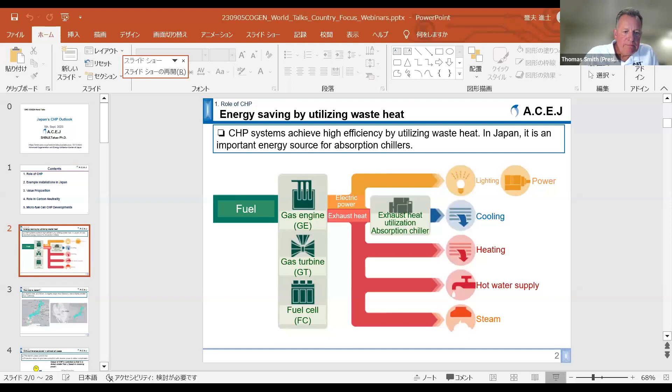Dr. Shinji, you may be on mute there. Okay, perfect, I hear you great. Can you also turn your camera on, please? Camera on, okay. Ben wants to make sure he's looking at you throughout the presentation. Can I start?

You don't have start video on. Can you start video, so we can see you? He just wants you to turn your camera on while you're presenting. The host stopped the video. Just say start video, you'll be fine, and it'll still share your screen. I will find a way to solve that. I tried to start the video, but the host stopped the video. Okay, you're back. Sorry about that. You're welcome to start.

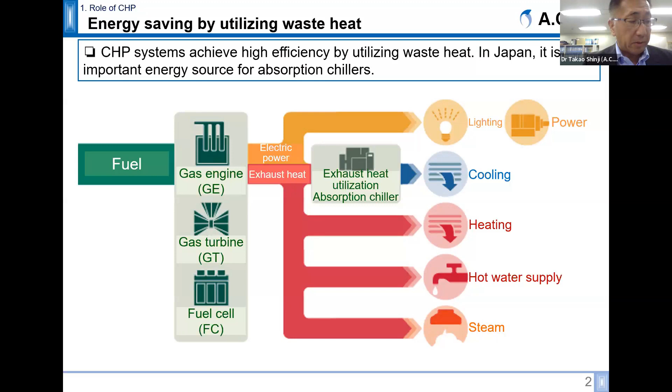CHP systems achieve high efficiency by utilizing waste heat, which is usually converted into steam in industrial use. Japan runs mainly north to south and therefore has distinct summer and winter climates. For example, temperatures in Tokyo range from 35 degrees in summer down to 0 degrees in winter. Both heating and cooling are important and benefit from utilizing waste heat in a CHP system.

In Japan, it is common to operate CHP without reverse power. In other words, excess generation is rarely sold back to the local utility. The reasons are related to the price of power and the technical requirements for grid interconnection. The price the utility is required to pay is rather low, making it uneconomic for the generator. In contrast, PV output is more economic.

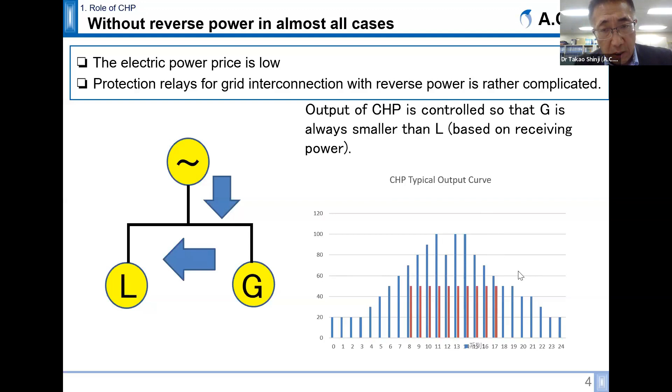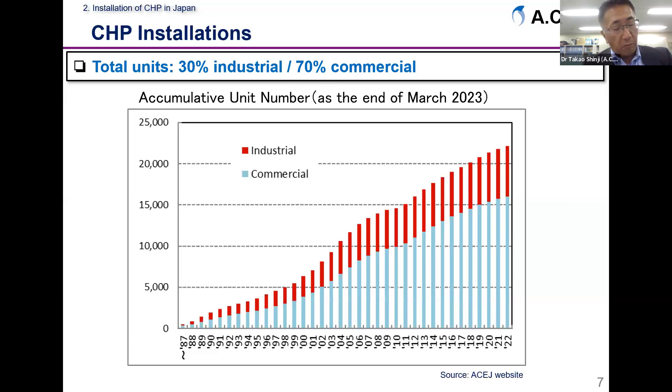If we look at the breakdown of installed units, about 30% is industrial and 70% is commercial. That is because industrial loads require larger CHP units. Industrial CHP units are usually in the 2 to 5 megawatt range, while commercial units are in the 0.2 to 0.5 megawatt range. This is the capacity, and this is the unit number.

The next, this is the industry breakdown by sector. Of course, utilizing waste heat is integral to CHP, and so sectors that consume a lot of heat are most suitable for CHP. The chemical, food, pulp and paper sectors are good examples.

The pulp and paper industry has used CHP for over 100 years. The pulp factory generates electricity by combusting a pulp byproduct known as black liquor. The steam produced is used for drying paper.

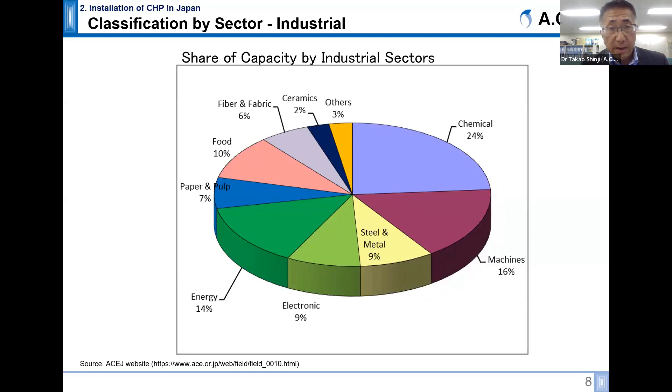This is the sector. This is the capacity. This is the number of units.

Third, the new values of CHP rather than energy saving. Energy arbitrage is a valuable tool for consumers who are looking to cut costs and reduce their environmental impact.

In the past, the price of electricity used to be constant regardless of the season, the time of day, or the available supply of electricity. Now, Japan Electric Power Exchange, or JEPX, runs a wholesale electricity market, and the price of power varies with supply and demand.

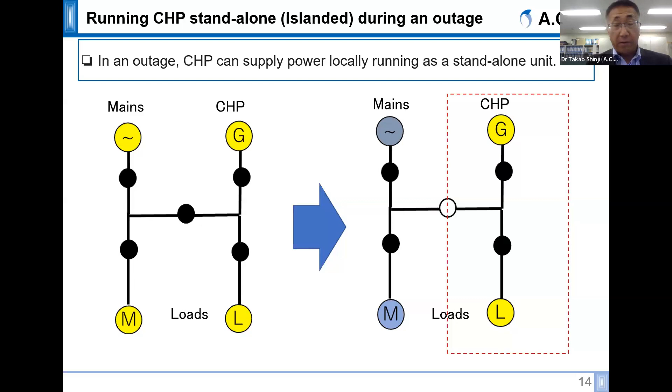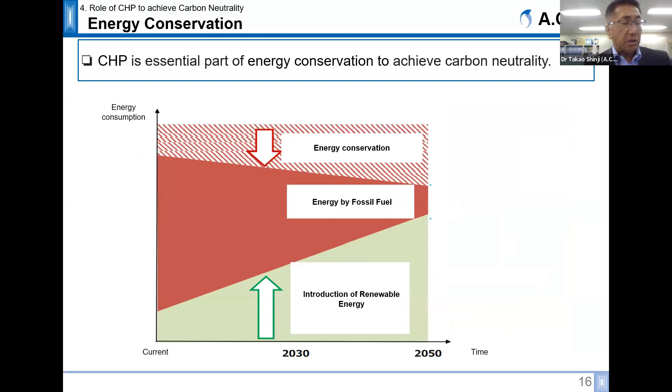And fourth, the role of CHP to achieve carbon neutrality. Energy conservation is one of the most important benefits of CHP. Of course, renewable energy is key to achieving carbon neutrality. CHP saves energy by producing electricity and utilizing waste heat.

And the coordination with renewable energy: increasing penetration of renewable energy, such as photovoltaic and wind, reduces the proportion of large-scale thermal power plants. This increases fluctuations between capacity and load, and the ability to provide balancing power gets smaller. CHP can start and stop quickly and easily modulate output, so it is useful as an element of balancing power.

In addition, CHP can provide inertia to the grid. This is important, as inertia will be in short supply as the share of renewables increases.

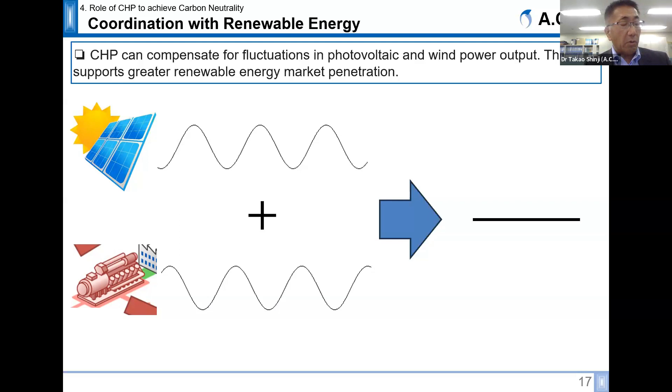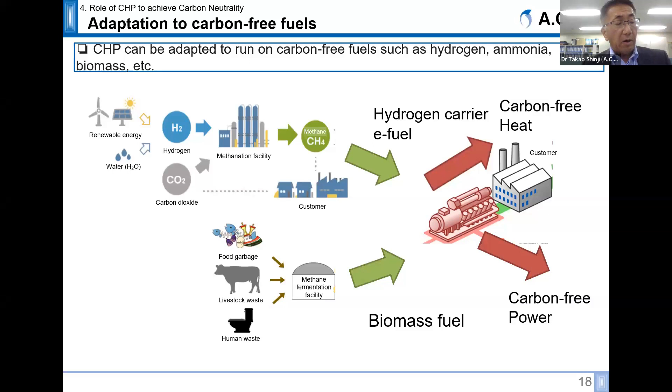Finally, I will show you the development and introduction of the micro CHP fuel cell.

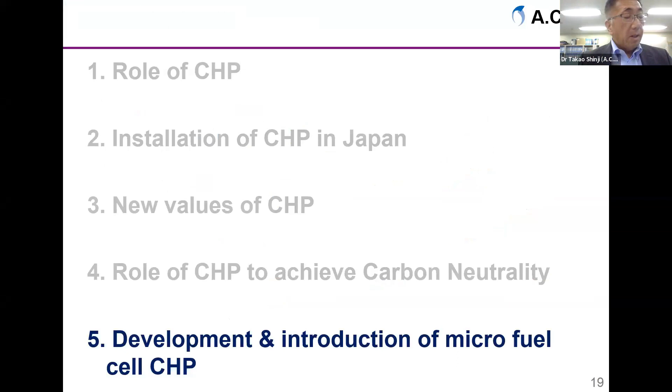Let's look at the micro fuel cell CHP, which is Japan's branded with the name ENE-FARM. We have two types of fuel cells: PEFC, polymer electrolyte fuel cell, and SOFC, solid oxide fuel cell. SOFC has higher efficiency and lower waste heat recovery efficiency than PEFC.

So the SOFC has a smaller hot water tank. As for the number of installations, over 40,000 units are introduced every year, and the cumulative units are 480,000 as of the 2022 fiscal year.

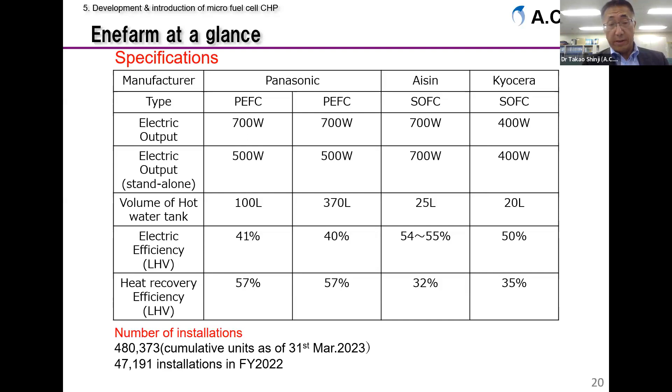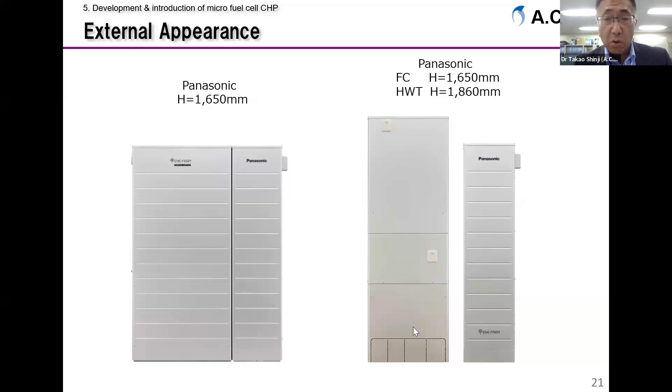The smaller one is the fuel cell, and the larger one is the hot water tank. This is Aisin. This is SOFC, which is smaller. The height is 1.2 meters.

The Kyocera, this is much more smaller. This is a fuel cell, and this is the hot water tank.

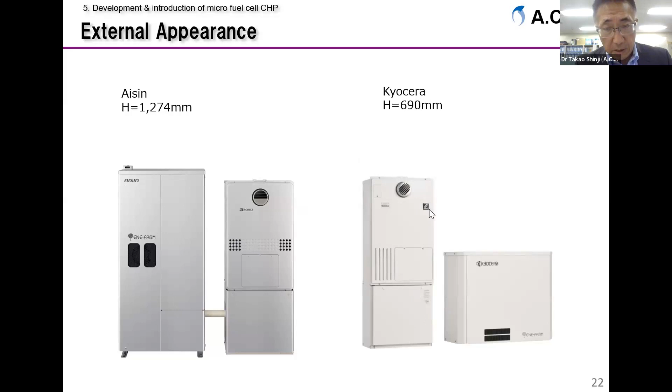I'll show you the recent developments of the fuel cell. I'd like to tell you about some recent developments of ENE-FARM. The system now has internet connectivity, and ENE-FARM can receive the weather forecast. If the probability of an outage is high, ENE-FARM is ready to disconnect from the grid in advance and run standalone if there is an outage. And the generation plan can be made based on the predicted PV generation and weather.

They have now integrated an electric heater. If the gas supply is cut, the electric heater can provide hot water. This also means that the hot water tank can be downsized, and Panasonic has reduced their tanks from 130 liter to 100 liter.

Next, the smartphone application is available. It can be controlled and monitored remotely. Energy efficiency is increasing, from about 40 to 41%, up to 47 to 50%.

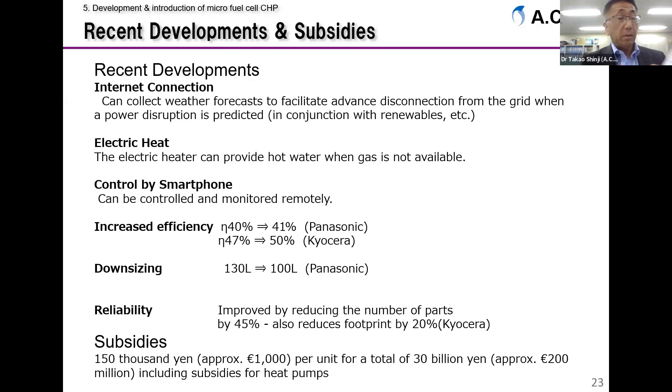So I'll show you some example cases of CHP introduction. One is an industrial case, and the other is a commercial case. Both are the best performing CHP in Japan.

Let's look at the Kiyohara Smart Energy Center in Tochigi, which is approximately 50 kilometers north from Tokyo. The area north of Tokyo has developed more industrial areas in recent years. The Kiyohara Smart Energy Center consists of 3 companies that operate 7 facilities: one is a food producer, the second is an optical instrument company, and the third is a pharmaceutical company.

The 3 companies have different load curves that together create a leveled load curve. The center introduced a 35 megawatt CHP system via their own power lines and heat conduit. Consequently, energy use and CO2 are reduced by 20% compared with a conventional gas turbine.

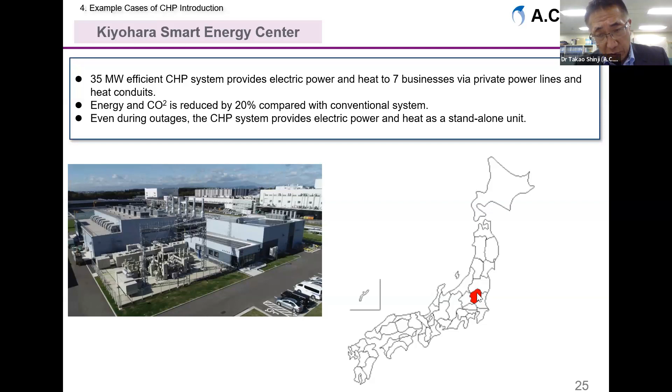So this is the outlook of the Kiyohara Smart Energy Center. This is Tochigi Prefecture, about 50 kilometers from Tokyo. The Smart Energy Center consists of 6 units of gas engines, about 6 megawatts times 6 gas engines.

The electricity is supplied to the factories, R&D centers, and offices across the 7 facilities. Also, the waste heat and boiler produce steam to provide for these factories.

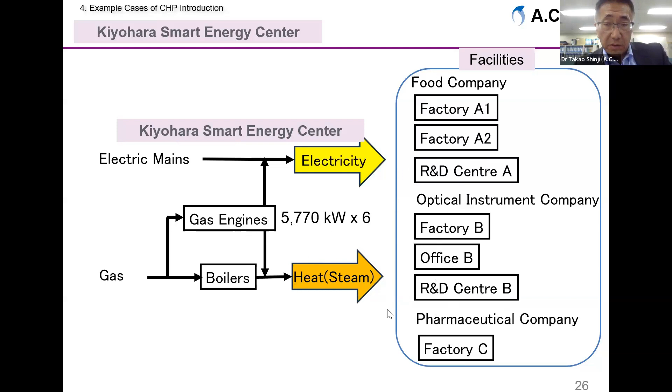Next, finally, I'll show you an example of the commercial use of CHP. Let's look at the commercial example, called the 46 Smart Energy Center. It's in Hokkaido, on the northern end of Japan. The 46 in the name is related to the facility's address.

The latitude of Hokkaido is about that of Corsica in Europe, or the northern part of the US from Oregon to New York. Hokkaido is a rather cold area, where utilizing waste heat is useful.

The waste heat from the energy center is directed to local loads to melt snow and ice during the long winter. The gas engine CHP feeds the district heating and cooling network to utilize waste heat.

In addition to utilizing waste heat, the heat pump utilizes geothermal heat, and the solar heat collectors are about 40% efficient, which is about 2 or 3 times higher than photovoltaic cells.

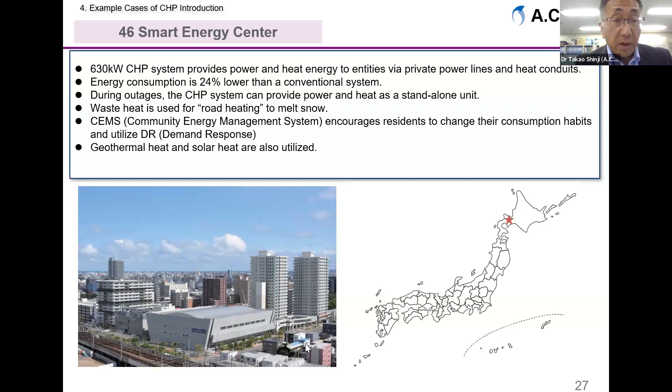So the 46 Energy Center consists of rather small 2 times 300 kilowatt gas engines. The electricity is supplied to a gymnasium, condominium, and fitness center. Also, the waste heat is utilized.

So this is all for my presentation. I hope that this presentation will help to spread CHP around the world. CHP will get more important in the era of carbon neutrality. Thank you, everybody.

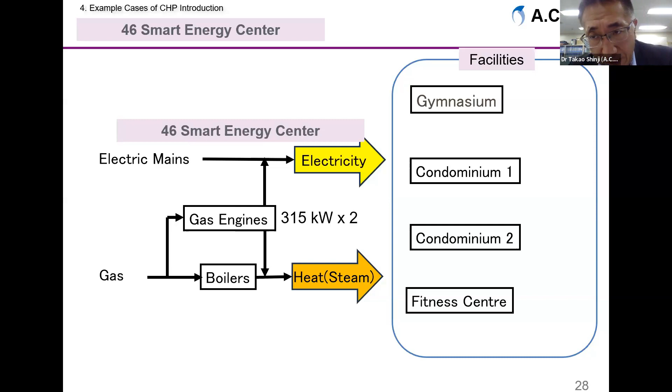I think the potential for Japanese CHP is about 200 megawatts for each year. 200 megawatts a year? Yes.

As I mentioned, the installation capacity fluctuates year by year. For example, after the great earthquake in 2011, there was installation growth.

After that, the installation of CHP grew up greatly because people wanted to install CHP for the benefit of standalone use, to secure electricity during outages. So on average, the potential for CHP is about 200 megawatts for each year.

Got it, thank you. The next question: what kind of conditions and environment drive CHP in Japan? I think you mentioned the ability to use thermal energy for heating and cooling, or in industrial applications like drying, as in the paper industry. Anything else to add?